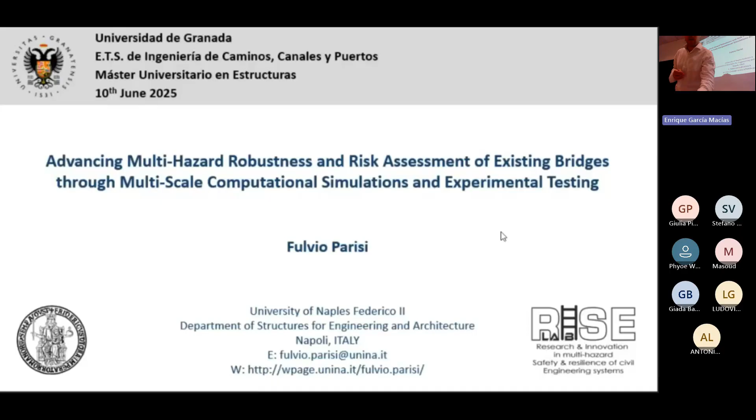So first of all, I would like to introduce you about our research framework at the RISE Lab of University of Naples, Federico II. These are a short list of the main topics we are dealing with in Naples in order to provide the best of our information and knowledge to all the stakeholders regarding civil infrastructure, particularly for existing highway bridges, and hence to foster multi-hazard engineering or delivering some optimal solutions for both design and, more critical, the assessment side for this critical infrastructure in order to provide solutions for more safety and also sustainability of our disaster risk management. So here we will focus on multi-hazard risk assessment, but also with the integration of numerical simulation and experimental testing.

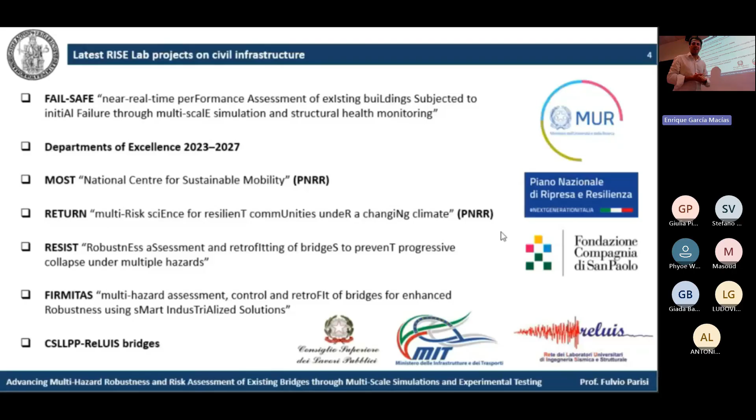This is a list of our latest research projects regarding civil infrastructure. And the first one is the project mentioned before by Professor Garcia Macias. So fail safe. Actually, we are now shifting from the paradigm of fail safe to safe to fail. So this is our challenging objective of next future, I would say. We obviously collaborate with several companies. You will see which are the outcomes of this cooperation, particularly for the management of existing infrastructure. And so this is the outline

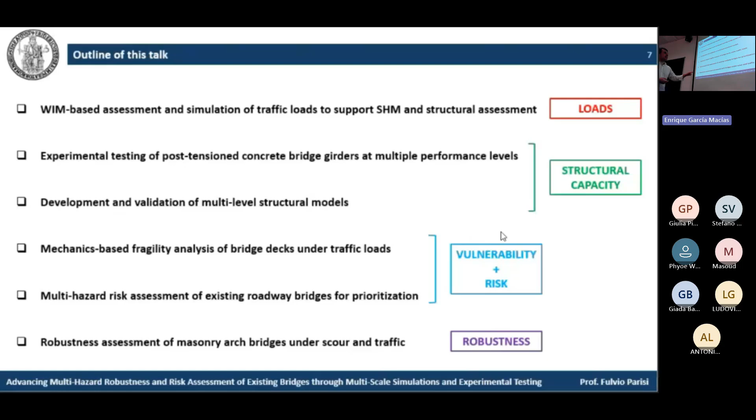of this talk. We will first of all talk about loads. Why? Because we have to assess the variability of the input loads to our infrastructure, and this is why, based on weigh-in-motion systems, we are now assessing a lot of data. So I would say, first of all, collecting a lot of data and then analyzing them in order to support structural health monitoring, but also structural assessment, particularly of existing bridges. So we will also move across structural capacity assessment, both from the experimental and numerical sides, and then we will end up with some vulnerability and risk studies regarding roadway bridges. Finally, ending the presentation with the robustness assessment. So first of all,

we collected a lot of data regarding weigh-in-motion systems. This is not only to support structural health monitoring, but also in view of facility managers to support the assessment of traffic overloading, because one of the most recurrent criticalities for the management of our bridges is the presence of overloading, which in many cases has also produced the collapse of some bridges, particularly in Italy, but also in other parts of Europe. We also used the WIM data in order to develop some models, I would say probabilistic models, for vulnerability and risk assessment of existing bridges. And so we selected some case study bridges in order to collect data, and starting with this rationale behind this system.

The systems were initially installed by facility managers in order to deviate some exceptional vehicles. So in one case, we may have a negative weigh-in-motion check, where we are able to assess the exceedance of some thresholds which meet safety requirements of the bridges, particularly. And in this case, we are able to deviate heavy vehicles. In other cases, we have a positive check, so the traffic is allowed on the civil infrastructure.

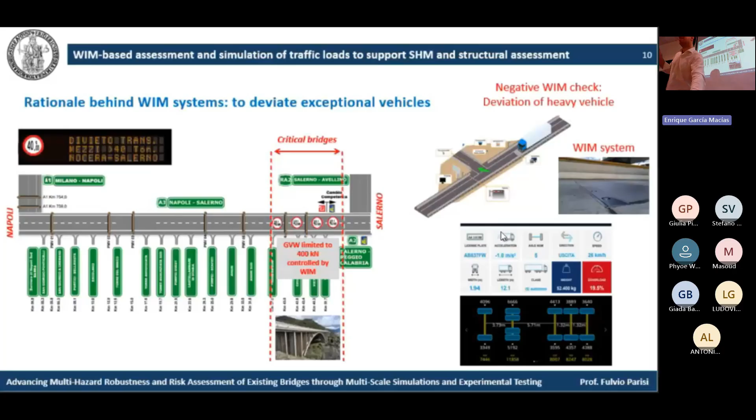So we selected 2 weigh-in-motion stations. Why? Because in this first station, which is called Fratte, we were able to enforce some restriction of gross vehicle weight to 40 tons, so more or less with a 10% tolerance with respect to 44 tons, which are the safety threshold of, at least in Italy, our guidelines for the traffic.

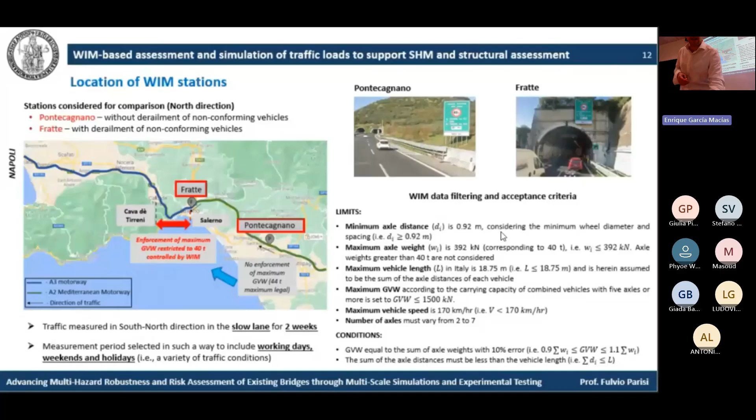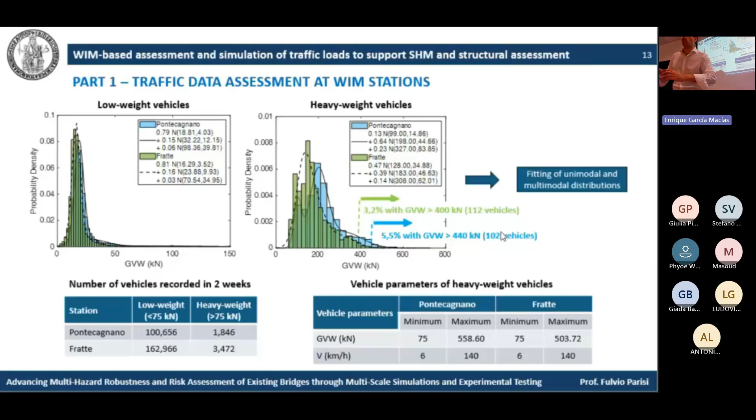In part one, we assessed the traffic data. This is, for instance, the outcome of our clustering of low weight and heavy weight vehicles. We were able to record over 2 weeks, in order to assess also variations with respect to several days of the week, but also several conditions, working days, for instance, with respect to the others. And then we compared the traffic data with other weigh-in-motion stations in Europe. For instance, if you look at the Igualada station in Spain, we have more or less the same conditions as Pontecagnano and Fratte, which are Italian stations: more or less 500 or 600 kilonewtons for the maximum gross vehicle weight.

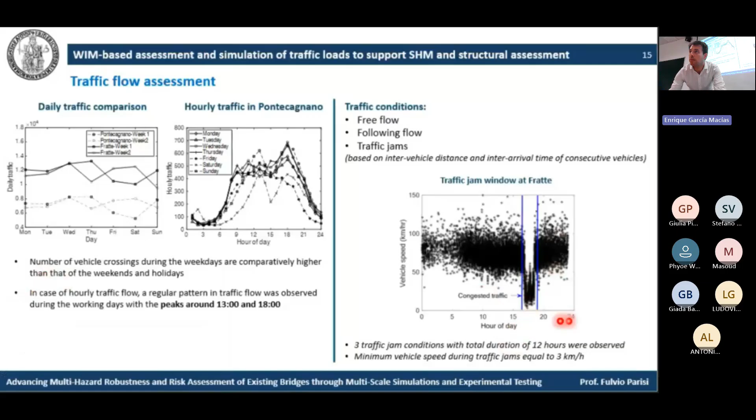Then we assessed the traffic flows. Weigh-in-motion stations provide you good data in order to differentiate between several traffic conditions: free flow, following flow, but also traffic jams. In this case, for instance, you can see here a traffic jam with respect to a 24-hour time window.

As you can see here, the problem is this very small figure in terms of frequency of occurrence, more or less 2% of heavy weight vehicles. This is the worst condition for the bridges. So very rare events for the bridges, but if they happen, they can produce catastrophic consequences for the bridge.

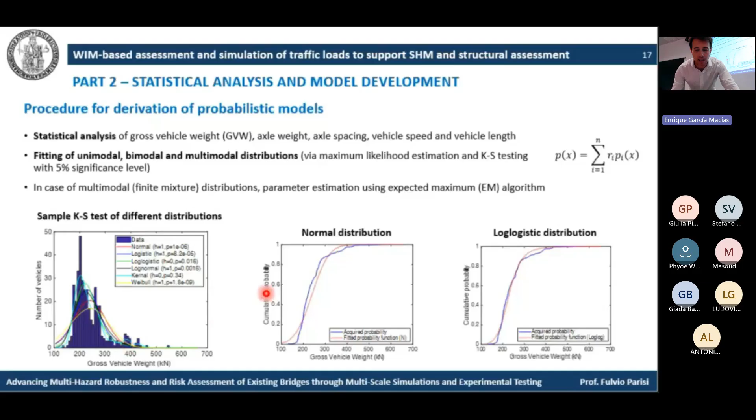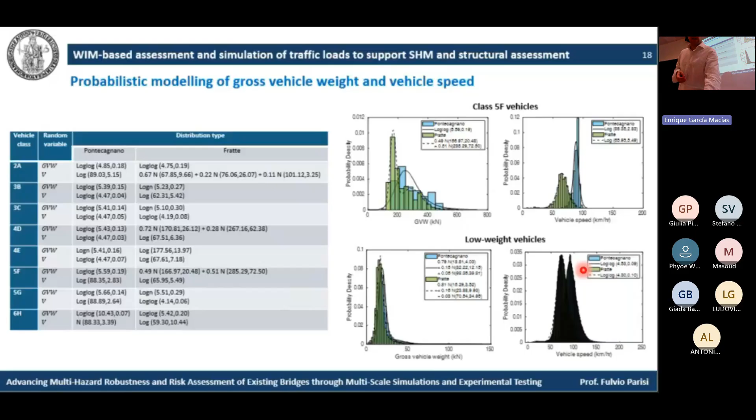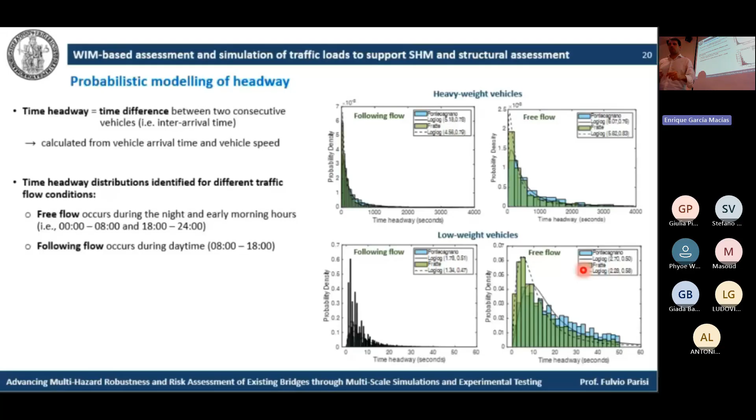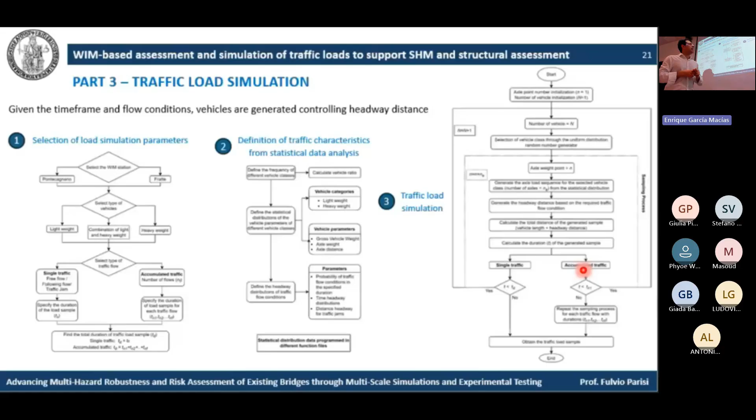Then in the final part of the study, we developed and validated a simulation procedure in order to ideally simulate vehicles running over a bridge. Based on the previously mentioned probability distributions, we simulated the vehicles transit over a bridge in order to assess, in this case, for instance, the different weight conditions on the bridge itself, and then simulating the different traffic conditions. Here you can see free flow, following flow, and traffic jam.

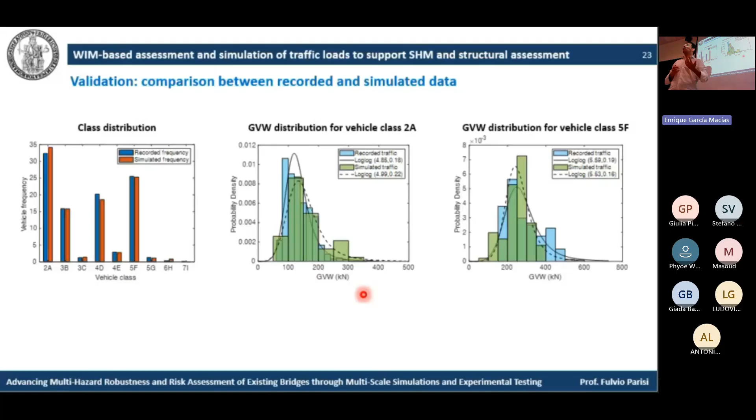Then we validated the procedure for each class from 2A to 7I. And then we compared the recorded versus the simulated data sets in order to develop some probabilistic models that can be used for vulnerability assessment, but also to be coupled with, I would say, some SHM systems. Okay, and then performing an input informed SHM of civil infrastructure. But this was the first part of the study, because then we

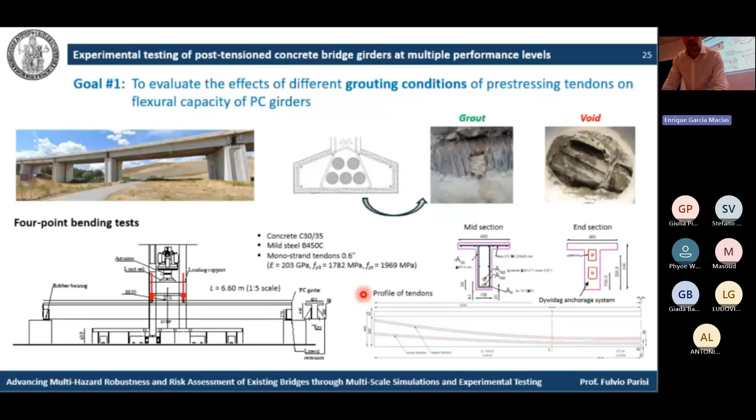Okay, so we simulated one of the most recurrent static schemes for bridge decks, which is the simply supported one. And then we also simulated the presence of the tendons. So in this case, 2 monostrand tendons within the concrete girders that were post-tensioned. So before testing, we pre-stressed the steel within the tendons. These are some pictures regarding construction and pretesting phases. All the strands were also equipped with strain gauges in order to monitor the level of pre-stress together with some load cells at the end sections of each specimen.

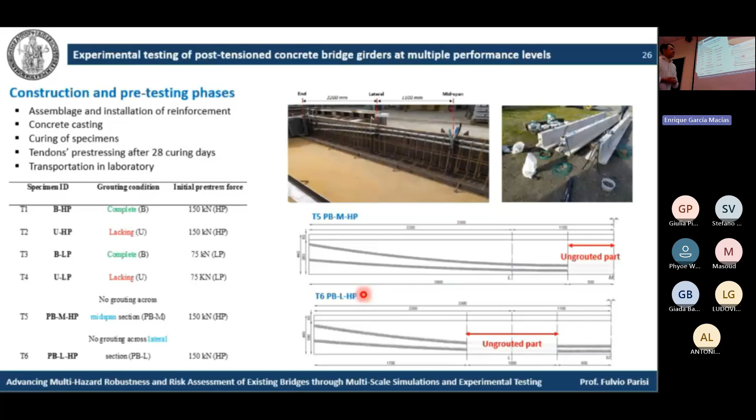Then we defined two loading protocols. Why? Because we would like to produce some knowledge with respect to two main conditions for the bridge: serviceability, but also collapse capacity. And this is why we defined the protocol number one, which is more or less oriented to a conventional safety check for the bridge. Then simulating three peak loads, one regarding serviceability limit states, so SLE. The other one is regarding the ultimate limit state, and finally we also scaled of 50%, sorry, the ultimate limit state conventional load. So we got three peaks in our protocol loading number one, and then afterwards we started the protocol number two, which is related to monotonic loading to collapse of each of the 15 girders.

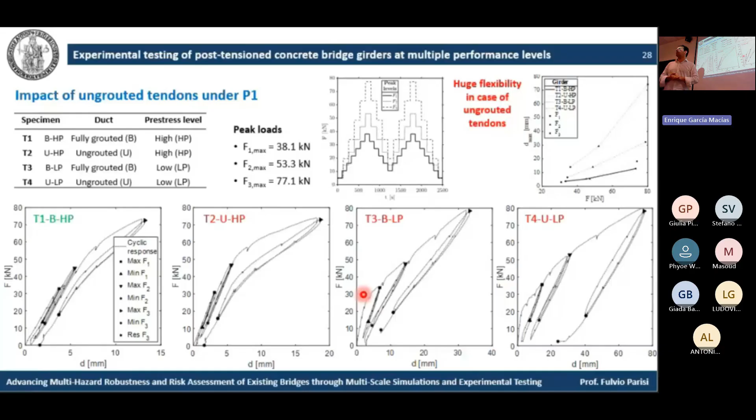What about the impact of lack of grouting? In this case, this may have a strong effect, for instance, on SHM systems, because we have a huge flexibility. So, if we, for instance, make SHM in terms of frequency variation, so we develop some control charts in terms of frequency variations, and then define anomalies in terms of frequency. This may be a warning case, because we have very large deflections of the concrete girder.

And so this may be a problem for serviceability assessment, because according to guidelines delivered by the American Concrete Institute, so ACI, the ACI guidelines provide us with some indices, so some indicators. One of the most important indicators is the index of deviation from linear behavior. In this case, we are able to assess the variations, as a proxy of stiffness reduction, as the level of loading progressively increases over the bridge.

And so in this case, with respect to thresholds of more or less 25%, we are able to visualize conditions that exceed these thresholds in terms of serviceability. And this was the case of specimens with partially grouted or even ungrouted tendons.

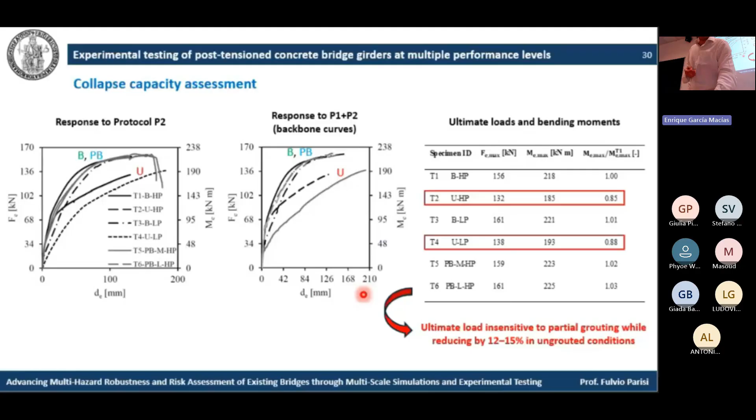But what about the collapse capacity? In this case, we can see that particularly in case of partial grouting, we don't have significant sensitivity with respect to the ultimate load, while in case of the lack of grouting at some locations of the girders, we may have a 12 to 15% reduction, so loss of ultimate capacity. So this may be the case of ultimate limit state safety checks.

Then we also made some cross comparisons. On the upper part of the slide, on the right side, sorry, you can see the different locations for our specimens in terms of lack of grouting within the tendons. So in one case, we simulated partial grouting around the mid cross section of the girders. This is just half of the girders because there were some symmetric conditions for the girders.

While in other two specimens, we simulated lateral partial grouting. Okay, so we had an asymmetric condition of grouting for the girders. Please keep in mind this statement because we will see also the consequences of this asymmetric condition for the girders. But also we made some analytical studies in order to further expand our knowledge with respect to different effects of partial grouting, but also initial pre-stress level.

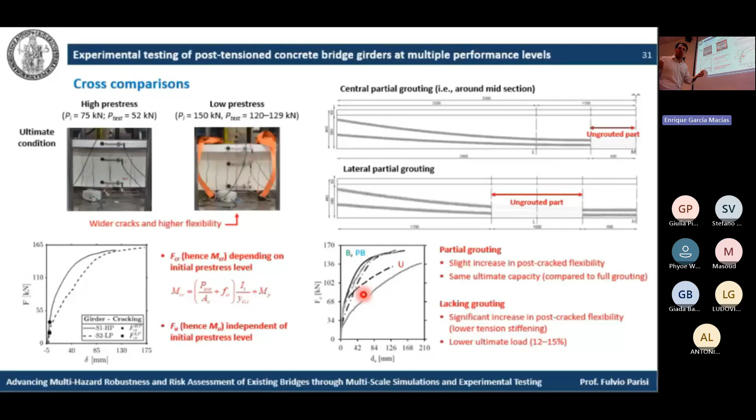And so here you can see that according also to this simplified formulation, we can state that cracking load, so serviceability, depends also on the initial level of pre-stress. This is opposite, obviously, to the case of ultimate conditions, where we lose the sensitivity with respect to the initial pre-stress. So we should be more aware of the condition degradation of the girders with respect to the loss of pre-stress within the tendons with respect to ultimate limit state safety checks.

Goal number 2 was also the evaluation of the effects of strand rupture, because in many cases, due not only to corrosion, but also if you look at the case of bridge overpasses, you may have some impact of vehicles over the bridge. And so in this case, you may have, as a consequence of the impact, some local damage to the bridge. In this case, we may have also a strand rupture, which may produce brittle failure for the bridge girder. Why?

Because we have a transfer and migration of stresses to the upper part of the cross section, and then we have an overstressing of the concrete slab. So in this case, we are able to see concrete crushing in the upper part of the cross section.

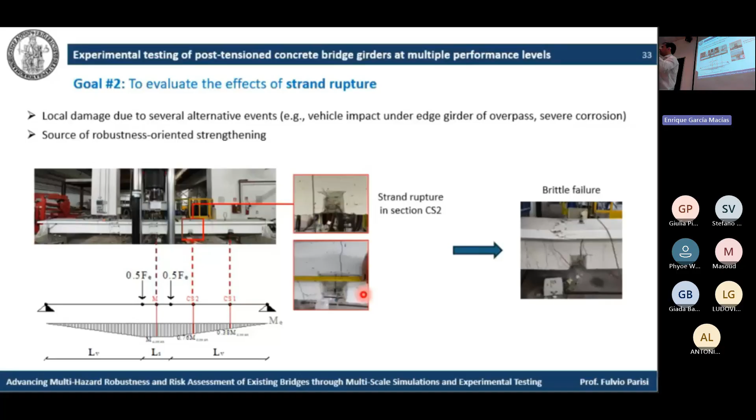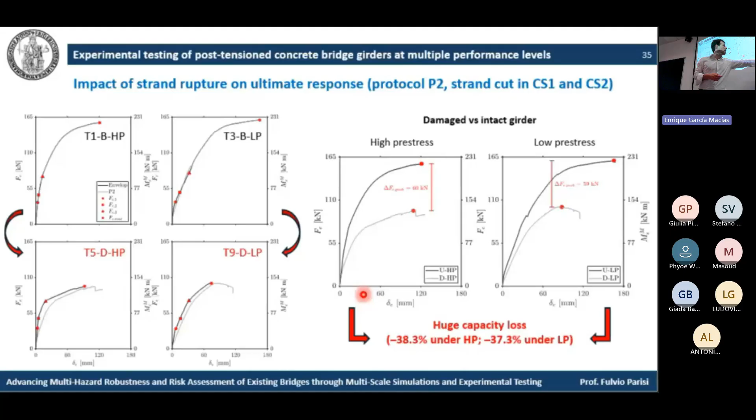In this case, we are now seeing that this capacity loss may even approximately reach 40%. So from 15% to 40%. Very huge. More or less irrespective of the level of pre-stress again. So 38% versus 37%, more or less the same.

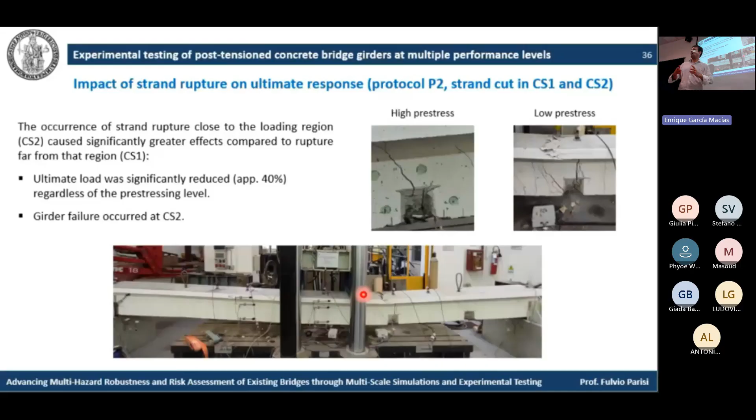And this was the impact of, if you look at the second picture of the overall bridge girder, the effect of local damage. We would expect the ultimate limit state condition at the mid section of the girder. But what about not only the bending demand, but if we look at the maximum demand to capacity ratio, capacity reduces significantly here due to strand rupture, and then there is a migration, a translation of the section where we have the maximum demand to capacity ratio. This is why we have rupture not at the midspan where we apply the traffic load, but more or less at the location of the strand rupture. So we have an asymmetric collapse condition for the girder.

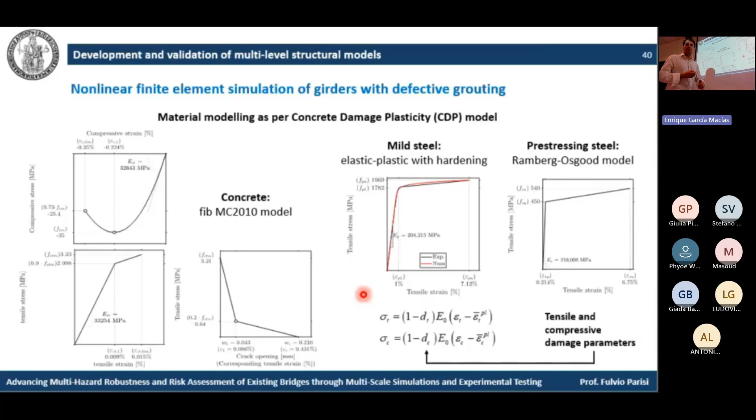And based on this benchmark experimental program, we then carried out some numerical simulation. This is the case, for instance, of nonlinear finite element simulation within Abaqus. In this case, we simulated two conditions, so bonded versus unbonded tendons, and then simulated the pre-stress force according to Savoia et al., which allows us to define a thermal distortion. So we directly applied a thermal distortion to the bridge girder in order to indirectly, I would say implicitly, simulate the tendon pre-stress within the model of the girder. We performed material modeling according to the CDP model, and hence according to this formulation that you probably know, with tensile and compressive damage parameters, which allow us to control the level of damage with respect to each material of the model.

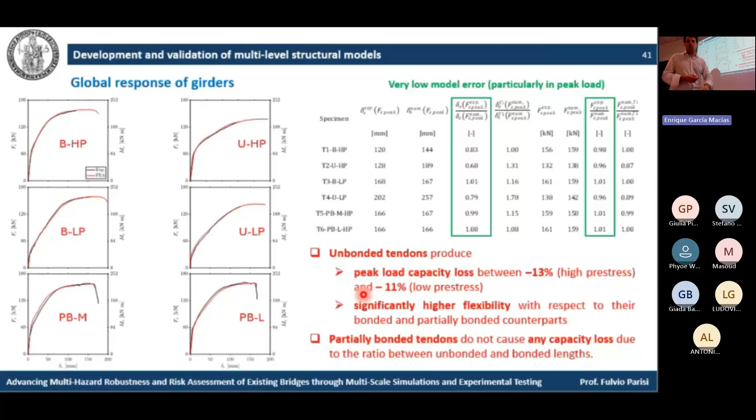Then we validated our model with respect to the experimental force displacement curves. So here you can see the comparison between the simulations and the testing, I would say. Here you can also see in green lines the outcomes in terms of model error. So if you are interested in doing some probabilistic assessment, here you can also include in your simulation the model error with respect to reality, so in our case, the experimentation.

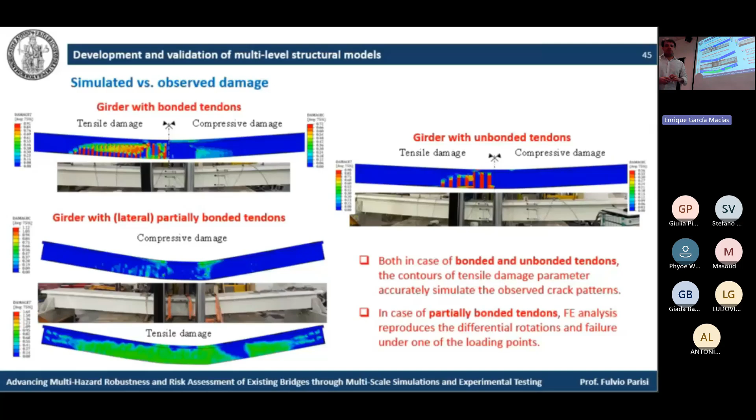While in case of unbonded tendons, you can see a strong difference in terms of the shape of the force displacement curve, with also a difference in terms of damage, both in tension and compression, because here you can see some concentration of tensile damage with respect to the previous cases, but also concentration of concrete crushing at the location of the loaded section. This is the simulated versus the observed damage, but I would like to stress this condition. So based on what I mentioned before, in case of local damage in the girders, we are able to simulate differential rotations at the end sections. And this may have some effects also in terms of operational modal analysis, so OMA again.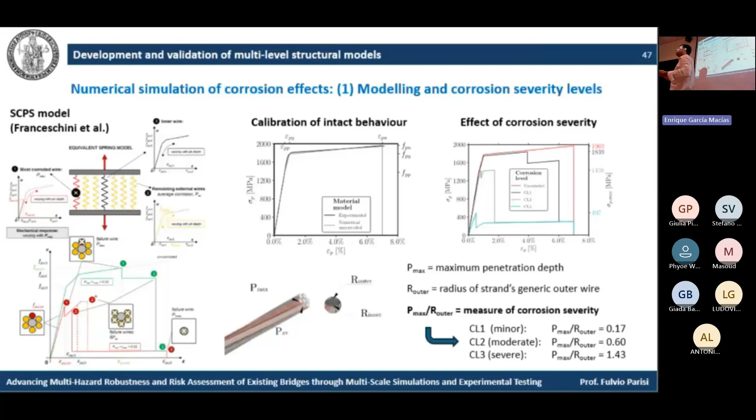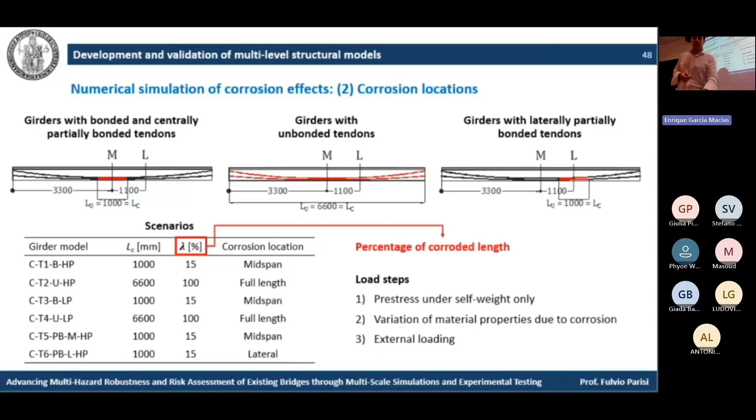We then simulated some corrosion effects according to Franceschini et al., so a simplified model where we are able to simulate the degradation of material properties with respect to, I would say, pitting corrosion. Then we calibrated, first of all, the intact behavior, and then we simulated different corrosion severity levels. So we defined three corrosion levels: minor, moderate, and severe. Minor corrosion may even happen in many cases. Okay, you can observe this type of corrosion. And then we simulated different locations and extents of corrosion with respect to the gross length of the girders, so between 15% and even 100% of the total span length of the girders.

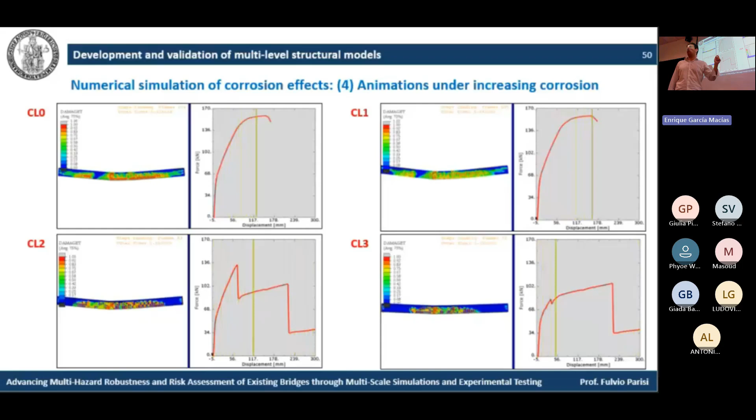These are the simulations, animations, I would say, of force displacement and also damage in the girders. We have a strong variability in terms of force displacement diagram, with even pre-yielding, premature collapse of the girder in case of severe corrosion, so CL3, the maximum one.

Then we performed a multi-level assessment with several computational approaches, not only finite element modeling, but also applied element modeling, in order to assess the possible benefits of the different computational procedures with respect to computational time. Why? Because particularly in case of a huge number of simulations in probabilistic modeling, we have to reduce the computational time for each analysis. And so this was the case because in case of applied element modeling, we reduced the computational time from 1 hour in Abaqus to 5 minutes.

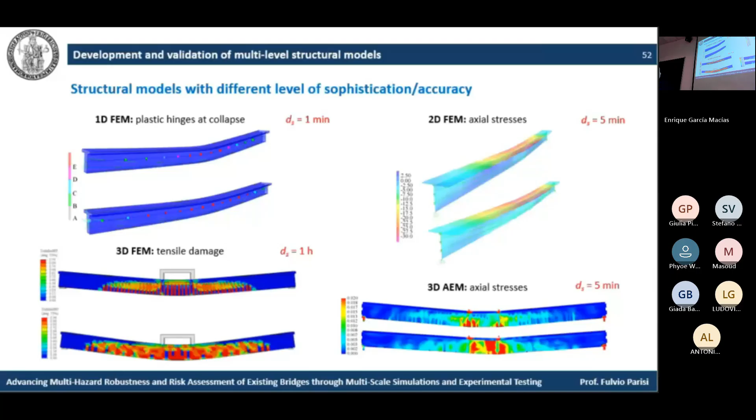And the difference in terms of different orders of magnitude progressively increases with respect to the size of the model. So this was the case of a single girder. But what about the case of a huge bridge deck? Okay, so this may be strongly important for us to speed up our computations, and this, however, is the case of the same accuracy, I would say, between finite element modeling and applied element modeling, with in this latter case also the possibility, if you look at the dashed line, to reproduce also the force capacity drop as deflection progressively increases.

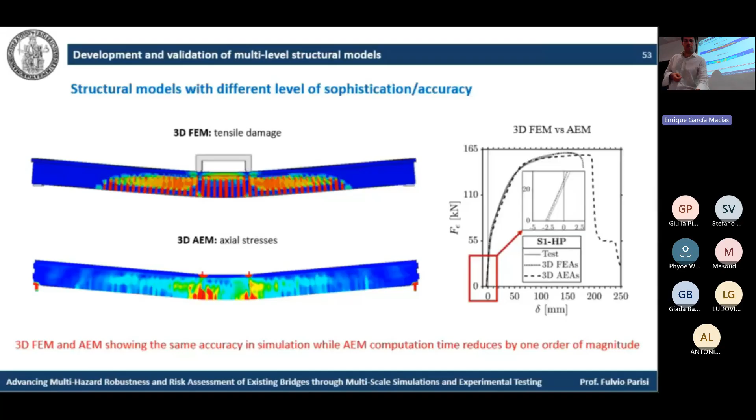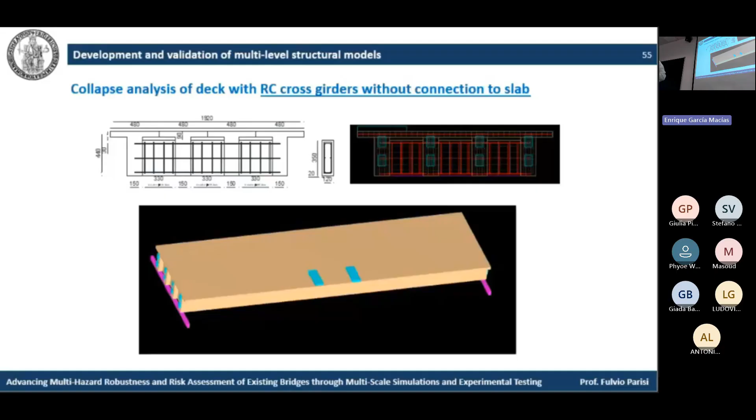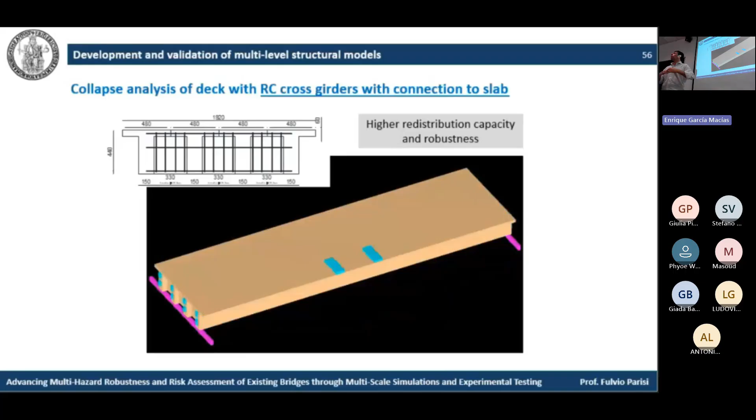And then we simulated the case of entire bridge decks, also according to several construction practice rules. So simulating, for instance, different conditions of connection or lacking connection between the cross girders and the slab. This may have some role with respect to redistribution capacity after local damage. Here you can see the case of higher redistribution capacity when we have RC cross girders connected to the slab. Okay, so in this case, you can see, for instance, here, tendency to some fracture line, here, but also there. So we have a more distributed damage and cooperation between several bridge components of the deck.

How? By means of a mechanics-based fragility analysis under traffic loads. So the measure of our fragility curves, the intensity measure, was assumed to be the level of traffic loading over the deck. This was the typical cross-section that we analyzed. And then, according to our previously collected data on material properties, we implemented all these things in terms of probabilistic modeling within our fragility analysis procedure in order to simulate different conditions for the deck.

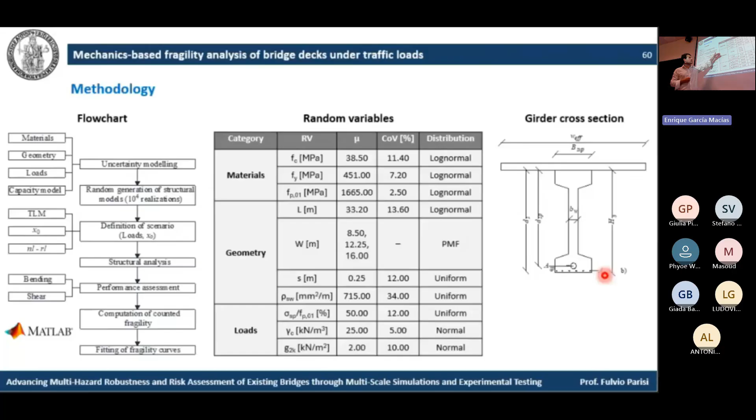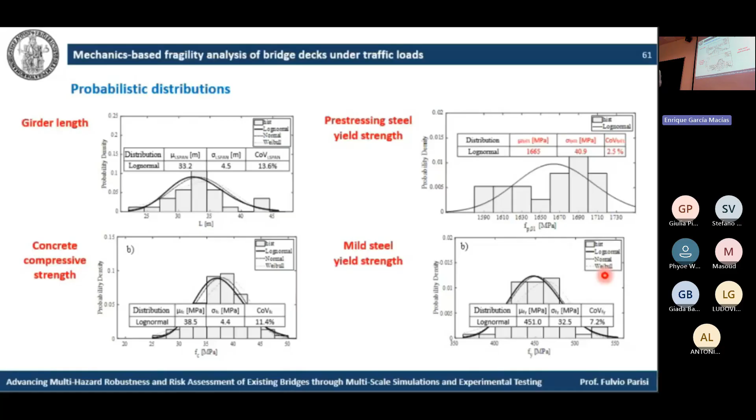This is the input in terms of uncertainty modeling for our analysis. So simulating variability in material properties, geometric properties, but also the loads. These are the plots, for instance, regarding probability distributions of girder length, but also pre-stressing steel strength and so on. Hence, according to a simplified component-based analysis, which was motivated by the possibility of running this type of analysis over a huge number of bridges, okay?

We then computed our fragility points with respect to this alpha parameter. And alpha parameter is the ratio between the intensity of the traffic load with respect to the design level. So Q sub D is the design level of the tandem load on the bridge deck.

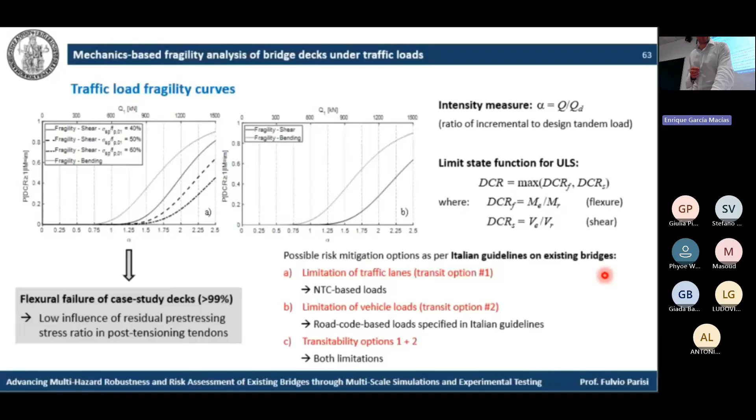Okay, so we have a normalized intensity measure, a dimensionless intensity measure in this case. So alpha equal to unity is the case of design loads over the bridge deck. In many cases, we identified some failure with respect to bending, while just in 1% of cases we identified some shear failure of the deck.

But what about the consequences, the benefits, I would say, of some actions decided by facility managers? In many cases, they decide to reduce the number of traffic lanes in order to have a trade-off between safety but also the operational level of the bridge, so transitability of the bridge itself. And what about the effects in terms of vulnerability? Because they are anthropic loads on the bridge, we are able to reduce not only the vulnerability, but also the hazard itself. Opposite to the case of natural hazards, obviously. And so in this case, we

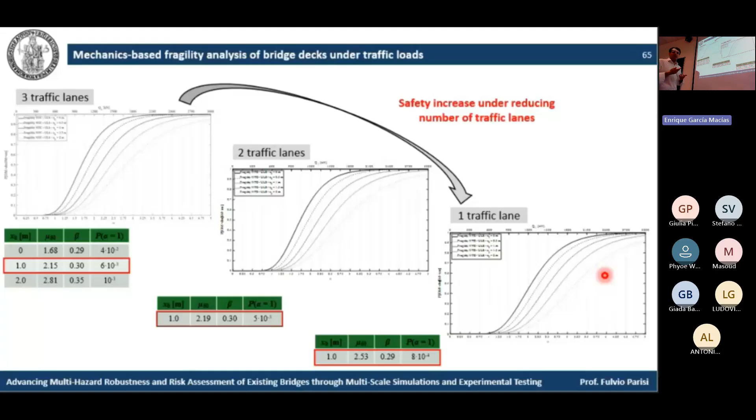defined the different fragility curves for 3, 2, and even 1 traffic lane. Then progressively reducing the ordinates of these diagrams. And this is reflected also by the progressive reduction in terms of probability of failure, because here you can see that, for instance, if you consider alpha equal to 1, so under design loads, the probability of failure reduces from 6 by 10 to minus 3 to even 8 by 10 to minus 4. So one order of magnitude. This is very good, obviously, for the reliability against traffic loads.

And what about the effects of another vulnerability reduction measure, which may be the increase in the distance between the traffic lanes and the curb, where the most stressed beam is located. What about the effects in terms of vulnerability? Obviously, also in this case, we simulated these different traffic conditions on the bridge deck, and then assessed the increase in the capacity of the bridge, and hence the reduction in terms of fragility against traffic loads.

In any case, here NTC stands for Norme Tecniche per le Costruzioni, so the Italian building code. And here you can see that regardless of the distance of the traffic lane x sub 0 with respect to the curb, we in any case have fragility curves with respect to NTC higher, okay, with respect to the Italian guidelines. This is an obvious consequence of the fact that we reduce the peak load from 60 tons to 44.

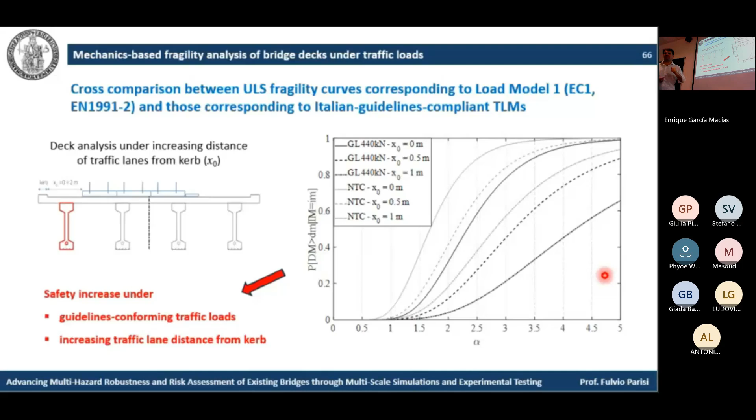And then we implemented all these things into a novel software, QBridge software. We are at the stage of submission for a paper about this software, which will be, however, available to everyone on the website of the ReLUIS, which is the Italian network for structural engineering and earthquake engineering laboratories.

But what about the inclusion of all the hazards together in order to have optimal solutions for risk reduction? Because we discussed the effects of the condition of the bridge with respect to grouting, strand rupture, and so on, with respect to traffic loads. But what about the other hazards? Earthquake, fire, so not only natural but also anthropic hazards. Italian guidelines provide us a very good approach, but this approach is based on qualitative assessment. So it is not based on some indicators of the risk.

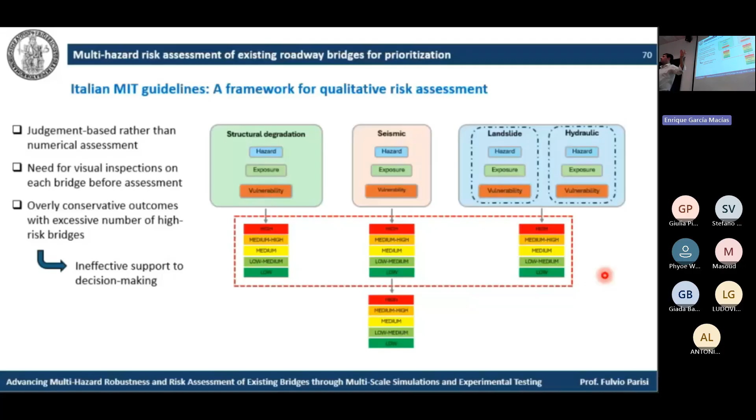Okay, so in this case, according to this flowchart, we first of all have a census of the bridges over the Italian territory. Then we perform some visual inspections, and then we are able to assess the condition of each bridge, and then we progressively are able to identify what is the level of priority for the bridges. The problem is that in many cases, based on these guidelines, we also have many conditions for high priority of bridges. This is by definition according to the qualitative approach. So here, for instance, for structural degradation, seismic, landslide, and hydraulic risk, we are able to define a priority class for each of them, then combining all of them into a single multi-hazard class, but considering these types of hazards. What about anthropic hazards? At the moment, they are not considered.

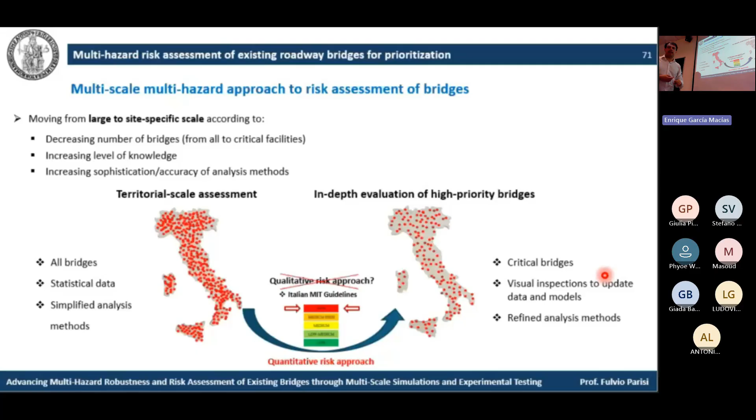This is why we formulated a holistic approach, based on some indicators, in order to perform, first of all, a territorial scale assessment, and then prioritizing the high-risk bridges, so safety critical bridges, for more detailed assessment. In our first study, we considered these hazards, so gravity loads, earthquakes, vehicle impact, and fire. Also combining the information with the condition of the bridge.

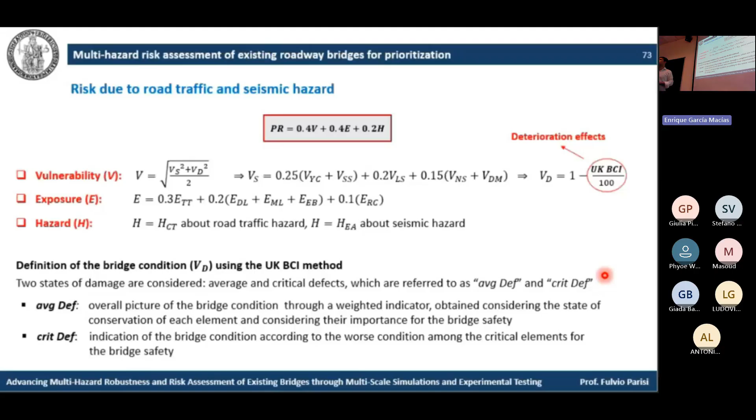According to existing literature, we defined the level of risk with respect to traffic and seismic hazards, so combining them into a single priority class according to either the average or critical component condition level. So according to UK guidelines for bridge condition index.

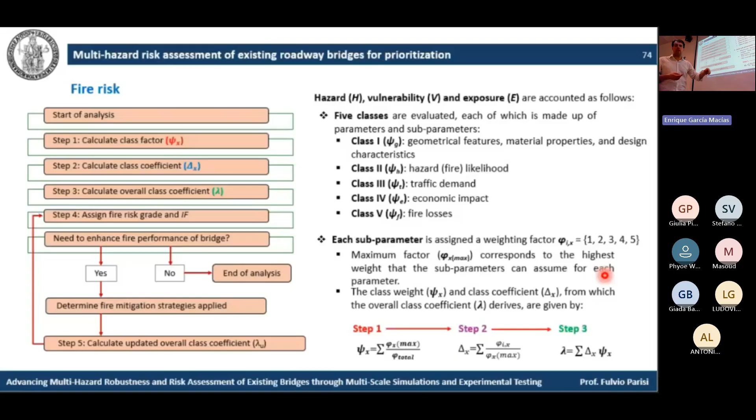And then we took into account the level of fire risk according to existing literature, okay? And the same was made for vehicle impact risk. In any case, we visualized all the components of the risk. So moving from the hazard, then crossing vulnerability, and then ending with the exposure.

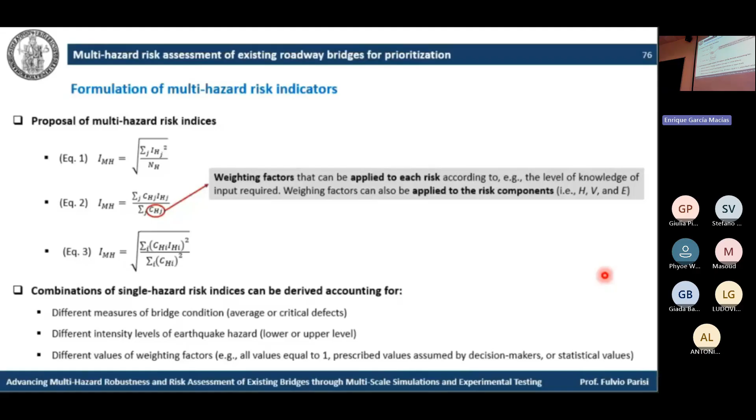But most of the novelty relied, I would say, in the proposal of multi-hazard risk indicators. So we combined all the risk sources into a single indicator in order to better prioritize interventions or more detailed assessment of the bridge, according to several decision-making related factors, which are these weighting factors for each single hazard assessment. So each risk indicator was weighted by a coefficient which may obviously be defined according to decision makers.

We then implemented this procedure over an initial stock of 30 highway bridges located in the north of Italy. In this case, we considered as an indicator of the traffic, not the WIM data sets, because we were in parallel progressively collecting and analyzing those data, but based on the average daily traffic. Average daily traffic is a common measure used by facility managers, but the problem is that also in this case, there may be a saturation of the high-risk class of the bridges. Why? Because we have an average daily traffic that exceeds the maximum level defined by the Italian guidelines. This may be an additional problem with respect to the overall problem that we are managing.

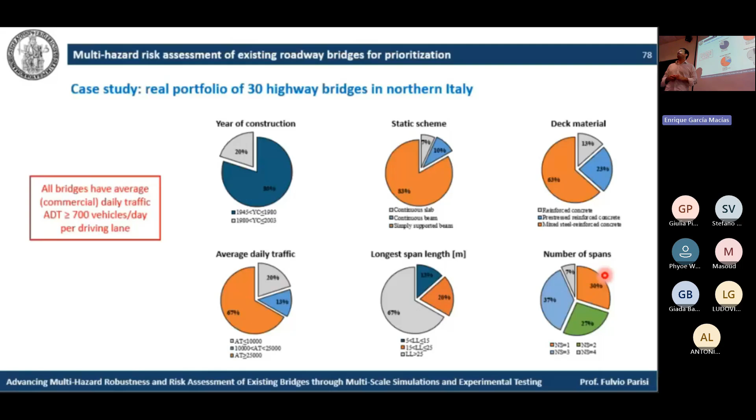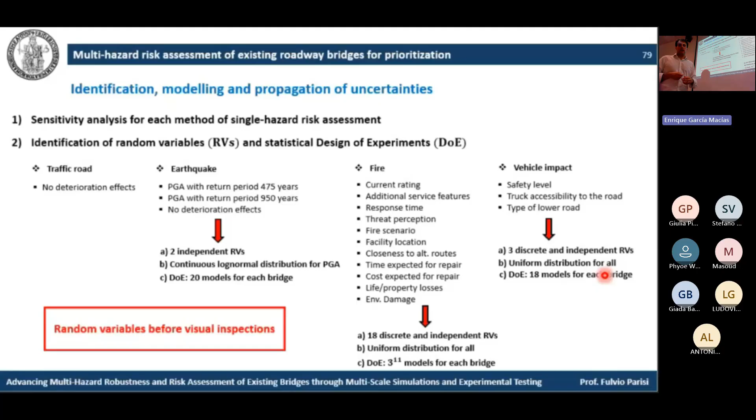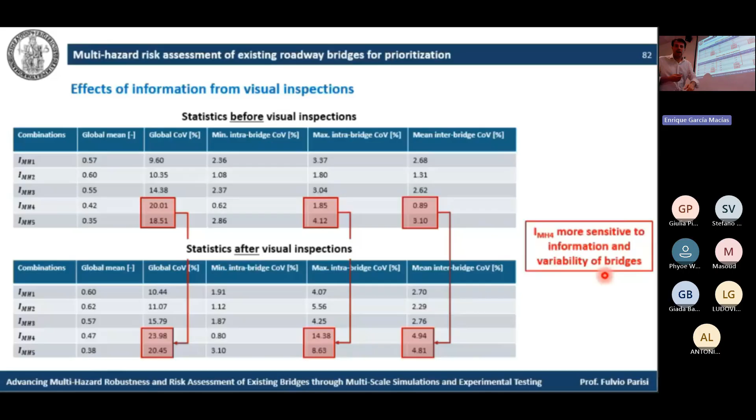Here you can see also different sensitivity levels of each indicator, and this is why we selected the fourth indicator among the 5 indicators that we proposed, because it is more sensitive to the information. And higher sensitivity is reflected by a higher coefficient of variation in terms of statistical analysis. Okay, and here you are able then to see the effects of this procedure and this information with respect to classification of each bridge. So we defined 5 classes.

We have a concentration of our simulation output in the middle part of the distribution. This is also the case of another ranking, which is not based on the mean value of the risk indicator, but on the upper tail value. If mu stands for the mean value, mu plus 2 sigma is the statistics with respect to the upper tail of the distribution.

But what about the possibility of redefining these thresholds for the risk classes as statistically based? If we look at the variability of the multi-risk indicators, then we are able to define the overall distribution of the multi-hazard risk index over all the bridge portfolio. In this case, we are able to assess the thresholds in statistical terms.

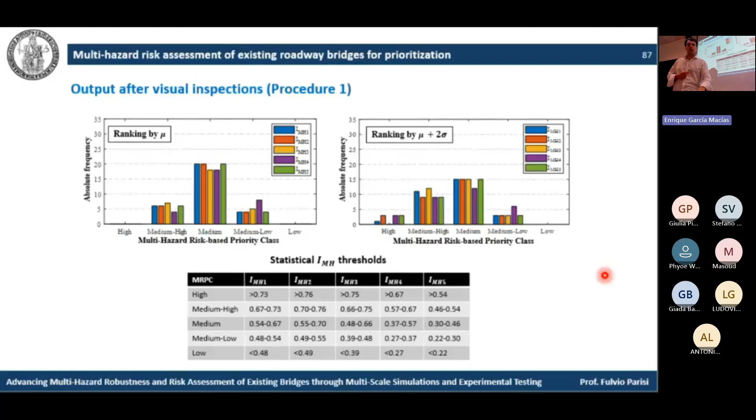This is the case of procedure number 1, where we accounted for all the variabilities in the properties of the bridges. But a more practice-oriented approach, procedure number 2, was based on the assessment of each bridge deterministically. So obviously, if you look at the practice by facility managers, they are not able to run the millions of simulations as in the previous case.

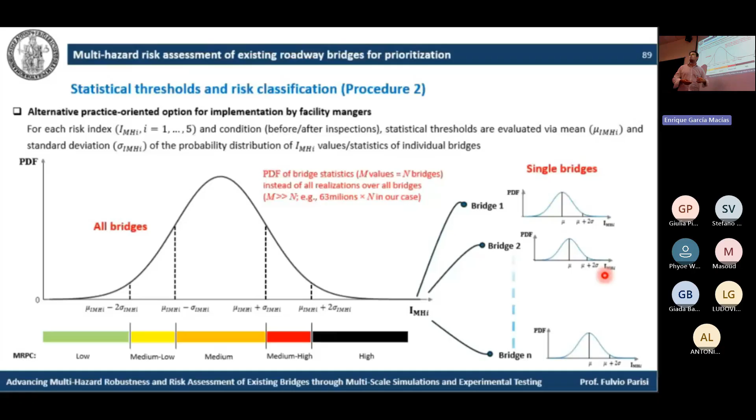So for each bridge, you are able to have a single figure, a single number. But again, if you look at huge bridge portfolios, you have a variability again of the multi-hazard risk indicator. So again, you are able to visualize this distribution, and again, you are able to define or redefine your thresholds for prioritization.

The problem is that if you use the more accurate approach, so procedure number 1, you are able to visualize in black which are distinctly the bridges that are actually in the high risk class. While in the case of procedure number 2, this is not possible in some cases. This is reflected by this comparison.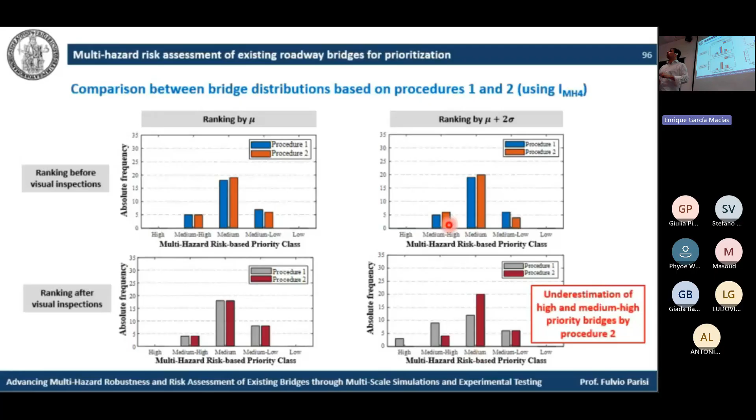If you look here on the right hand side, the lower part of the slide, you are able to visualize high priority bridges according to procedure number 1, but this is not the case of procedure number 2. You apparently would have 0 bridges in this class. So you may have an underestimation of the priority level of the bridges.

And what about the comparison with respect to Italian guidelines? Again, Italian guidelines would result at the moment into a possible saturation of the high risk class. This is not the case of our procedure when you have a distribution of the bridges. Why? Because the distribution of the multi-hazard risk indicator is adaptive. It's able to adapt itself with respect to each single infrastructure that you are managing. So this is by definition a situation that is not possible according to this procedure.

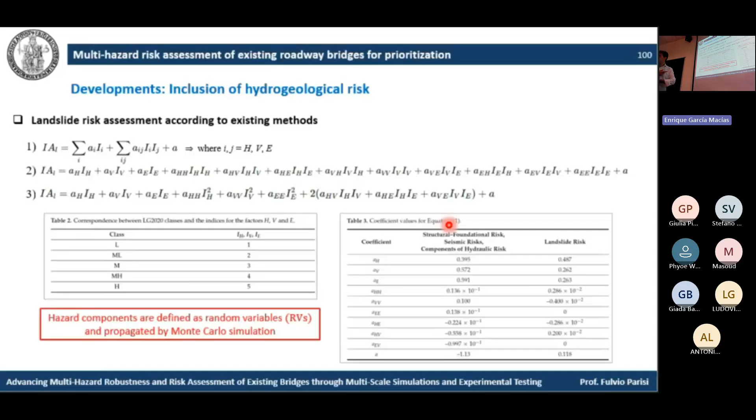The further developments are the inclusion of hydrogeological risk. We are now processing the data with respect to landslide risk, always according to existing methods, but according to our holistic procedure. Hydraulic risk also accounting for scour. And then we are now redefining our ranking for the bridges, also including the hydrogeological risk. So in this case, ending up with an overall picture about the risk, but with respect to all possible hazards that can

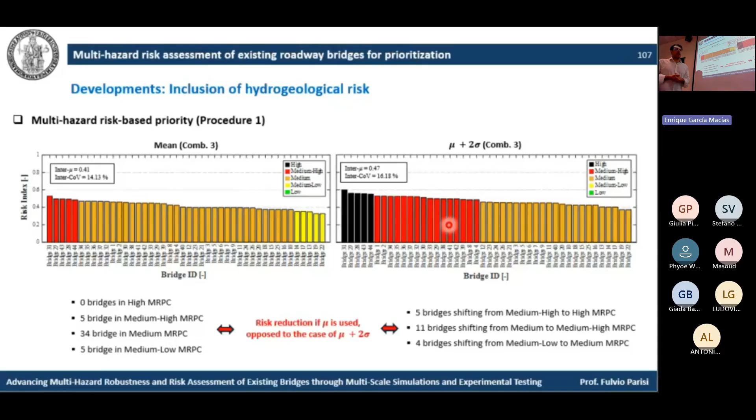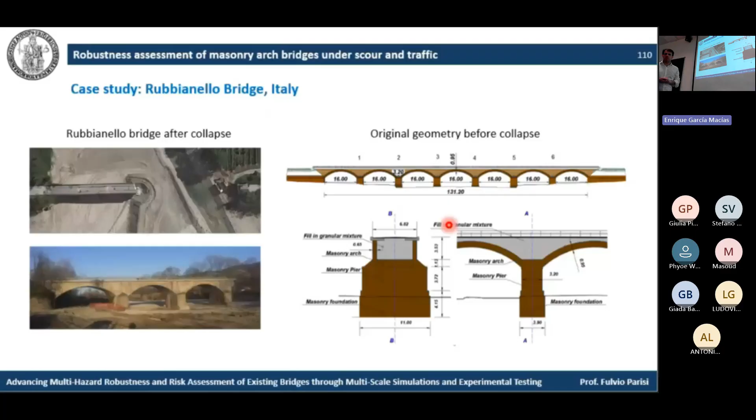threaten our bridge portfolios. And then the final part of this presentation is related to robustness, because of some local damage due to scour, for instance. In many cases, we are able to visualize some propagation of failure starting from obviously the scoured part of the bridge, then moving upward to the deck. And in many cases, it even ends with the collapse, as was observed in this case, which was the Rubbianello Bridge in northern Italy, which collapsed after a huge flooding event.

We modeled the bridge again according to a CDP modeling approach, hence considering different mechanical properties. I have no time to go more in depth in this study, but I will provide you also with additional information if you want through some papers. And then we are also accounting for different levels of traffic loading. According to the previously mentioned new traffic load models, so according to Italian guidelines, we simulated the heavy, medium, or light traffic loading conditions over the bridge.

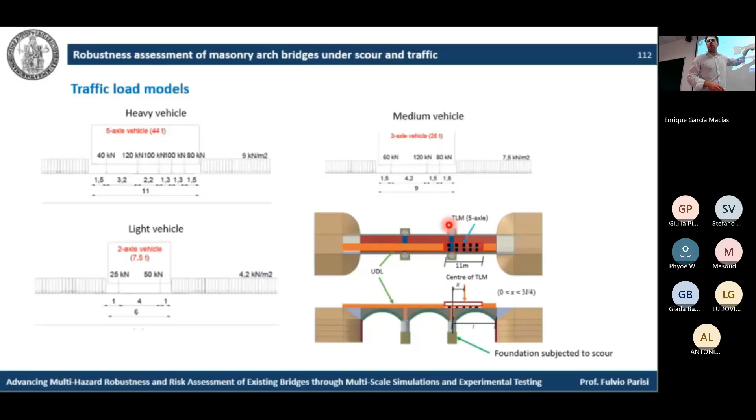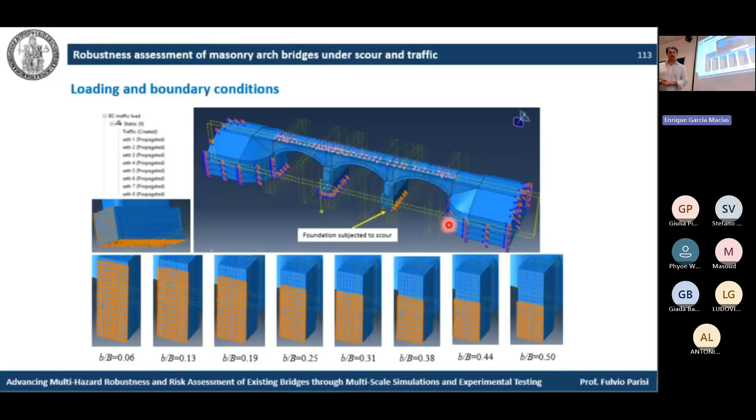And starting from 6%, then getting to 50% of scoured section, this section. And then we assessed the distributions of equivalent plastic strains within the model, which could also be correlated with some other proxies of the structural behavior. For instance, even the crack width in the model itself. This is a plot of the evolution of plastic strains according to an increasing level of scour.

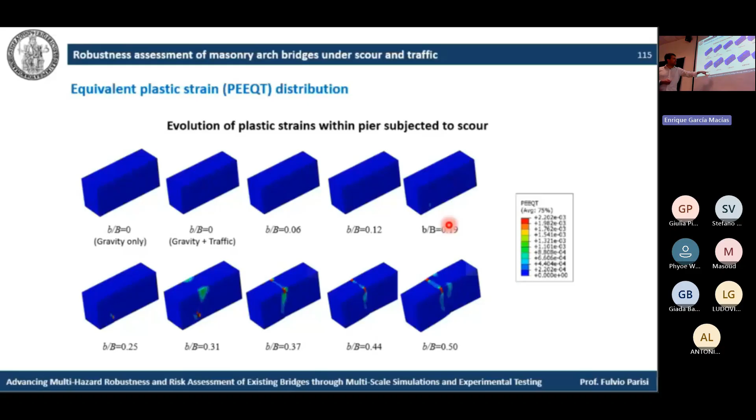And then we assessed the bridge robustness also in terms of displacement, so downward displacement of the bridge at different locations of the bridge, so piers, but also arches, foundations, abutments, and so on. According to the different locations of the traffic load with respect to each of those bridge components that could obviously be monitored through an SHM system, we are able to assess which are the maximum effects. And obviously, we confirmed that if we install an SHM system over a pier, then the worst condition is to have the traffic load at a location between 0 and 1/4 of the arch length of the bridge. While if we have a central loading condition with respect to the arch, we maximize the effects of the arch itself.

Then we are able to have another type of control chart, which is related to the displacement level, the downward displacement level of the scoured pier of the masonry arch bridge under increasing level of scouring. So we are able to define some thresholds after which the displacement may diverge due to a near collapse condition for the bridge. Then in further developments we could integrate this kind of model-based output with some more data-driven approaches, for instance, with respect to the input of traffic loading. So not only based on the conventional traffic load models, but on the actual level of traffic over the bridge, according to weigh stations, so weight measurements.